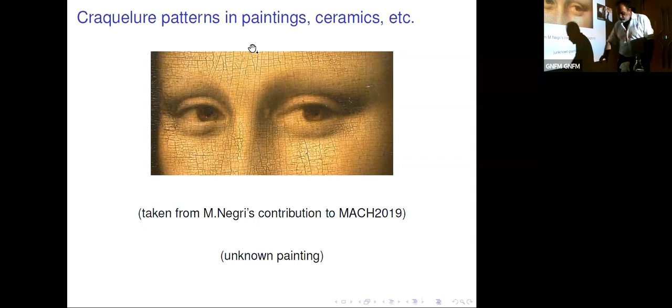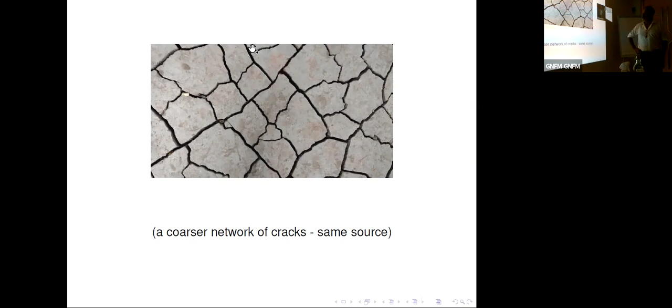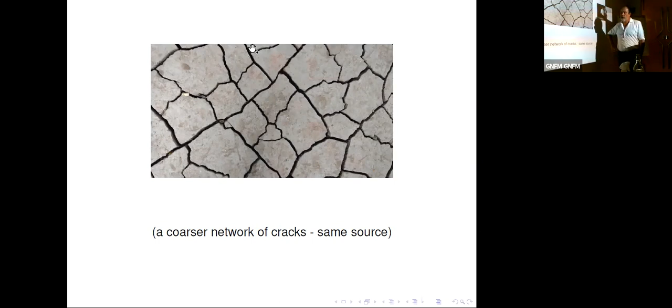So this is a kind of fracture that you can encounter in paintings, in other artifacts like vases or ceramics. You can encounter other types of more disordered cracks, and here is another more complex, more disordered crack in another kind of medium, in which you see very little ordering.

And this kind of phenomenon can be modeled using a two-phase, two-variable, say, mathematical model, in which you want to picture the surface of an artifact, for example a painting, and you model the behavior of the painting as a brittle medium deposited or glued to an elastic substrate.

So the abstract mathematical setting is that you are considering a thin layer of paint, or of glue or another material, which sticks to the substrate. The substrate, in the case of painting, is canvas, and what you want to explain and model is the pattern that you see on the visible surface.

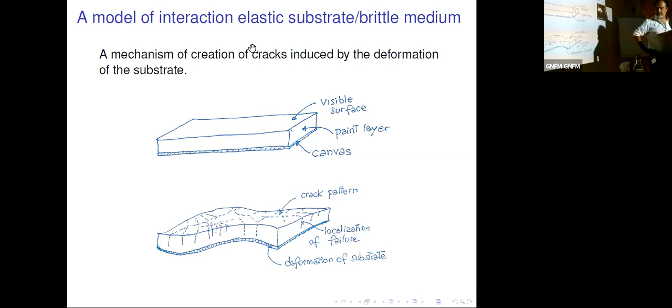So what you expect is that as you deform the substrate, so this is a mechanism driven by the deformation of the substrate, the deformation extends to the layer, which is brittle, so it may crack, it may dissipate elastic energy. And then you localize: instead of having everywhere a diffuse elastic response, you have a localization of failure in some zones, and what you see on the upper surface is a pattern of cracks.

So how to model? This is the geometrical part, very simple, and how you model then... I see the whole picture here. Please don't type.

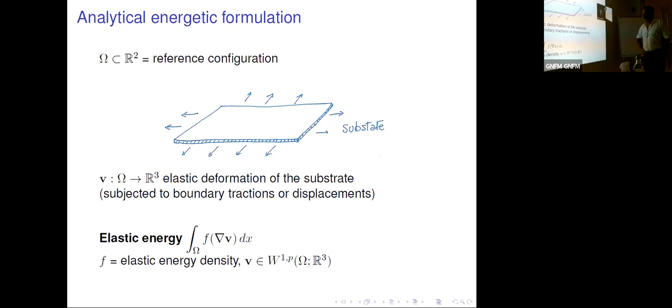So how do you model this mechanism mathematically, energetically? You have a reference configuration, the canvas, in which you have a variable which is still an unknown: the elastic deformation of the substrate, of the canvas. You suppose that you know almost everything about how it behaves. So you have an elastic deformation, which you can think of as being from R2 to R3, and an elastic energy, which you can think of as linear, depending on the gradient of this deformation. This is the usual elastic energy, and the variable is thought to be sufficiently regular.

On the visible, partially visible surface, you see also a pattern of cracks. So you have a deformation of the surface which allows for discontinuity. It's a brittle deformation, sufficiently smooth outside an array of cracks. The array of cracks can be thought of as the set of discontinuities of this deformation. That's why we have this S of U here.

And the energy is the elastic energy of the surface where it's not broken. Then the simplest way to model the introduction of fracture is by a Griffith criterion: the energy that you spend to open a crack is, in this two-dimensional case, proportional to the length.

Proportional with a factor which is called delta, which is the fracture toughness of the surface. And then you have an interaction region. So up until now, you have two unrelated variables. These are related by the fact that you have this thin layer, and you have an interaction term which depends on the difference, and so on the relative displacement measured on the reference configuration, two-dimensional configuration.

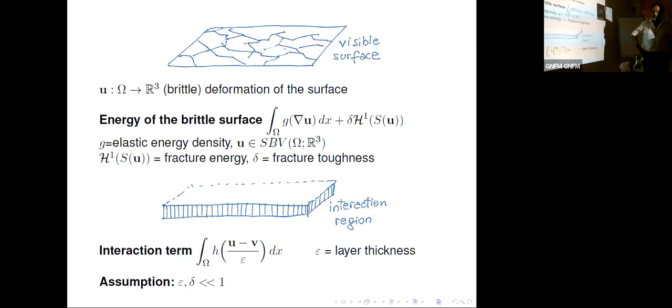And this depends on a small parameter, which is smaller or larger, say, but we can think of it small, which is the thickness of the layer of paint. And we think both of these parameters to be small. So you have a small layer painting. You think of classical paintings, not Burri or some other more recent, more concrete painting, say, and you allow for a lot of structure. So delta must be small, otherwise you cannot allow for a number of cracks.

Okay, and you sum up these contributions, and our result is an asymptotic result, which proves that in the end you have a homogeneous behavior of the medium, which is described by a single elastic deformation. So if you have small thickness and small fracture toughness, then in the end something which can be expressed by an asymptotic formula only in dependence of the underlying deformation. But now, okay, this was a mathematical result, which in a sense proved that you can have a theory in which everything then is hidden in this F0, for which you have a formula.

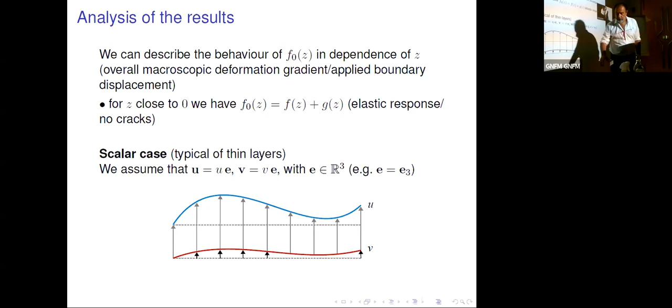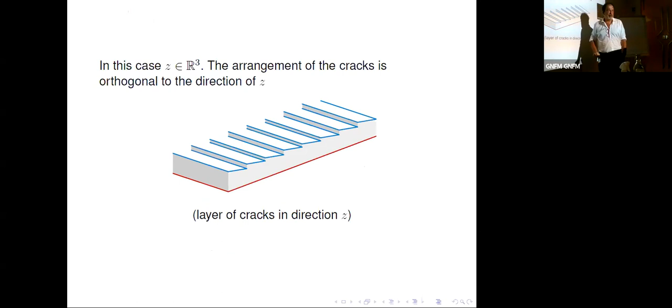So in this case, you have only a scalar variable, or two scalar variables, and everything can be phrased in terms of a scalar product. So the outcome is that, remember, now we are looking essentially at the profile of the deformation of the upper part, and we want to see the location of the discontinuities. And what we see is that as we deform in this direction, the gradient of deformation is aligned with the direction of Z, and you have cracks perpendicular to Z, and they are essentially one-dimensional. So the fracture is localized on lines, and everything can be reduced to a scalar homogenization problem.

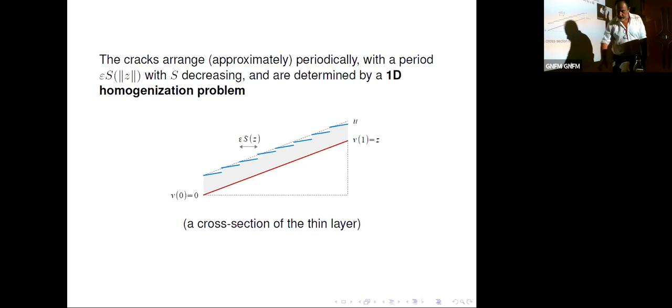So the problem here now is to determine the distribution of cracks. And we see that these cracks are distributed periodically. And this is the cross section of what happens in the orthogonal direction, and until some threshold, you have no cracks.

And this is not due to a geometrical periodicity. There is no geometrical periodicity like here, but this is just simply energetically driven, and the period depends on the only parameter, which is the modulus of z.

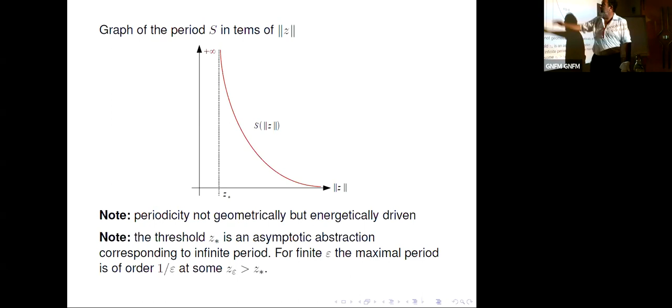It's important to see that here you have some abstraction, if you want. This plus infinity here, passing from plus infinity to a finite period, is something that you cannot do in a finite sample. In a finite sample, there will always be a gap here, and you start from some fine large but finite period.

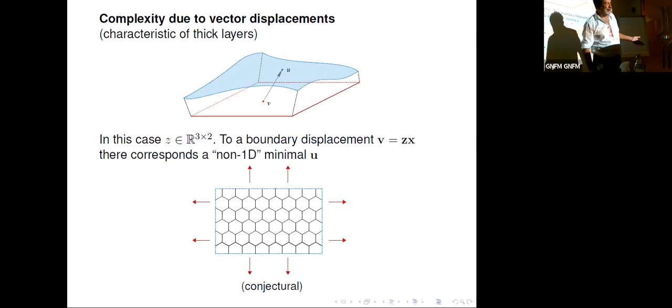Another answer is dynamic. So the complexity can be due to nonlinear evolution. You have a nonlinear term due to the fracture, which implies a lot of non-uniqueness in cases of iterated minimization problems. So if you model this evolution of these cracks, even if you think the evolution is quasi-static, it is probably driven by some very stressful events, like the variation of temperature and so on. So you cannot expect to have a continuous evolution of cracks, but some events which induce some bifurcation.

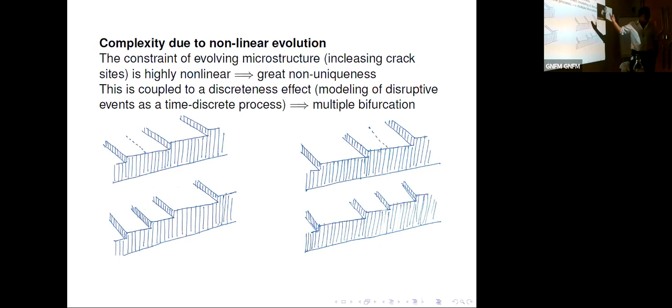So you make some experiments. The first time, even if you take a very simple sample, you get a regular array of cracks, but then as you evolve, at the second critical event, you may have a crack which develops independently on one side. For example, here you can have cracks which are periodically distributed, and then the next crack can appear here or there with the same probability. So you have multiple events in which you can choose, or you can have non-uniqueness.

So if you start pulling on one side, you have first a regular array, then you continue pulling, and you have a constraint that the cracks must be contained in the previous set. So energetically, you subdivide some of the cracks. It can be not energetically favorable to subdivide all of the cracks. Then, if the next event is in another direction, you want to generate cracks in this direction here. If you pull, if the strength is large in this direction, then you can have subdivisions which are not regular anymore. So you can repeat this bifurcation in more directions.

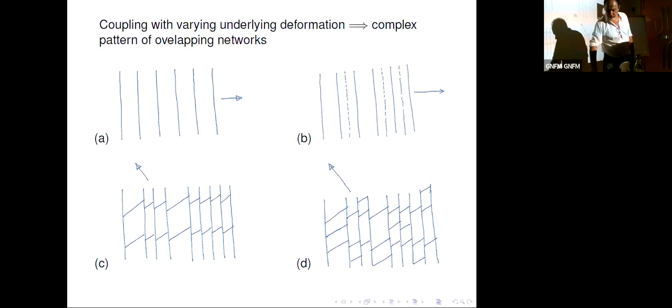So this, in a sense, explains that even for very thin layers, where the scalar approximation is fine or acceptable, you can have a complex pattern of cracks. And so this somehow is our answer to our curiosity about the application of the model to craquelure. I have to say that as you proceed, you see the interesting features of this kind of model. We can also proceed in other directions, which are maybe less linked to cultural heritage problems.

For example, we can impose a periodicity constraint on the crack. This can be thought of in the sense of a cultural heritage problem: craquelure in mosaics, in which you have a small size of the mosaic tile, which must be comparable with the thickness here. And here you have a lot more complexity due to the incommensurability effect, and this becomes mathematically very interesting.

So these problems maybe don't have a direct relevance to cultural heritage restoration problems, but still I can see that an influence, a suggestion, can come from these problems and can help us to develop new interesting problems, also in mathematics. Somehow there is a two-way interaction between these communities.

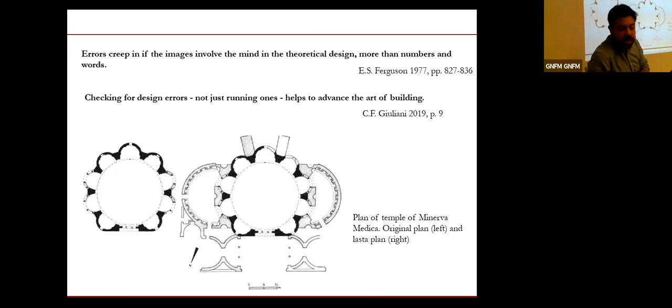Starting from a few suggestions coming from Ferguson and Cairoli Fulvio Giuliani, who said that in the study of cultural heritage we should study, first of all, the process of construction of a building or structure, not only what we have nowadays. In this process, we have to know why a structure or building was built in a particular way. Here you see the plan of the Temple of Minerva Medica, the original plan on the left and the last plan on the right.

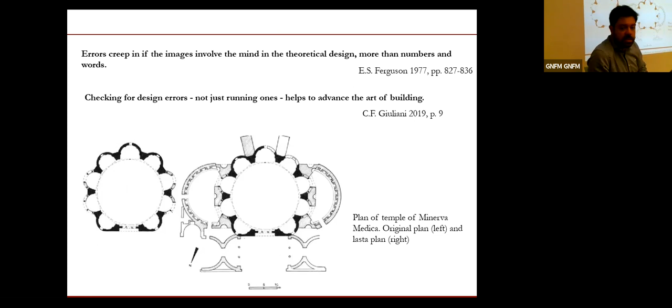On the right, of course, there are a lot of interventions—statical interventions to let the temple, the building, be more functional for the necessities of that time.

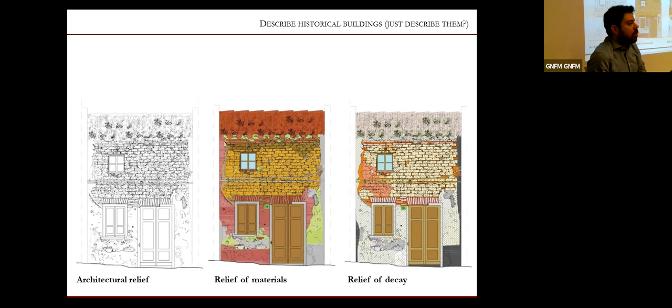Nowadays, experts who face historical architectural problems on historical buildings usually make a lot of different reliefs: one for architectural type, one for material, one for decay. All of them are different from each other, and all of them are usually taken as one lonely part, with no whole approach to the building. So my first suggestion is to think about the analysis of a historical structure as a whole body that could be studied in one single approach.

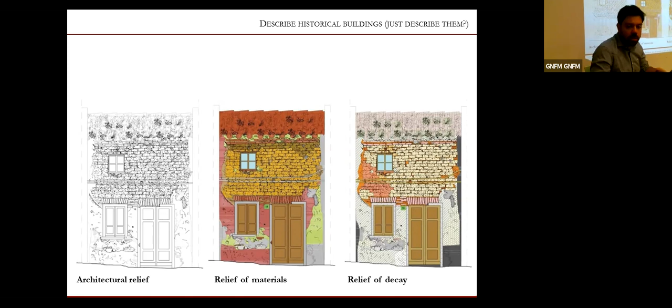This is the main goal usually searched for in cultural heritage: the creation of an atlas of materials, an atlas of masonry composition or mortar composition. This is usually taken as the point of arrival of each study, so not studying the structure or the process of the structure, but just studying the state of a building as we can see it today.

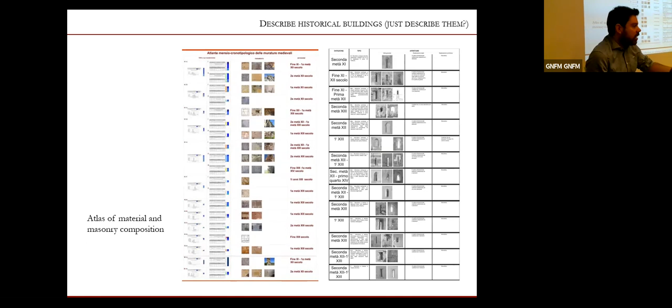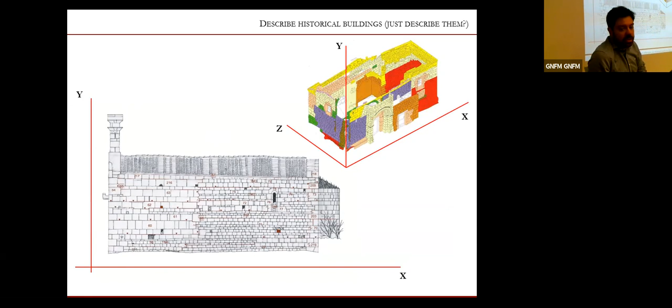Again, the idea is that historical buildings are usually studied as surfaces, as a sum of surfaces. So just through two dimensions, and not as a building should really be studied, in 3 dimensions, 4 dimensions, but just as a sum of surfaces.

What could be useful? First of all, Cairoli Giuliani called this type of research a crack map. Please bear with my graphic on the right, but we know that the damage of a building usually starts at the moment it starts to be used. Material starts to have damage at the moment that the building or structure starts to be used.

Along the story of the building, there usually come a lot of events that can increase the damage or increase the health of the building. To have a global idea of this situation, the crack pattern, a crack map, could be useful to understand how to intervene in this kind of situation.

First of all, trying to understand the differences and discontinuities of the foundation soils, so a study of the soils, to study the loads connected to the structure, the geometry of the building, and the variety of loads, accidental loads, permanent loads, that affect the structure. And of course events that can occur, like earthquakes, landslides, or sudden events that can affect the health of a building.

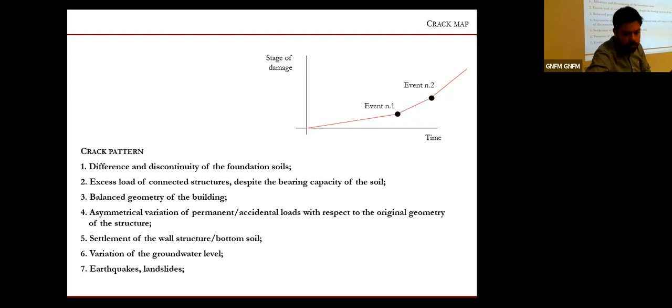I guess that of the 5 stages commonly used for fact-finding, for the study of historical buildings, a common fact-finding process, 3 of them could be useful even for mathematical modeling. First of all, a survey made by comprehensive autoptic verification on site, so a map of lesions, a map of the damage of the building, that could be helped by mathematical modeling.

An identification of the edification process, an analysis of structural change, and at the end, the 3D model, the representation of the building, that could be helped by the summary of the survey and the technical research made for this kind of research.

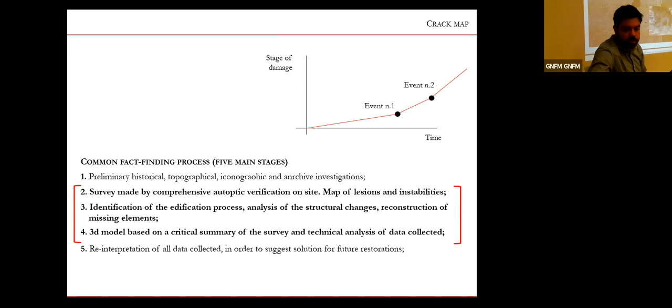This is a kind of event that I was mentioning. This is a part of the Aurelian walls along Porta Pia that was attacked during the battle of Porta Pia, and this event caused, of course, damage to the wall. We don't know exactly, but we can imagine that the entire structure of this sector of the wall still has damage today, that may be increasing over time. So this is the first stage, a first step that could be taken into account.

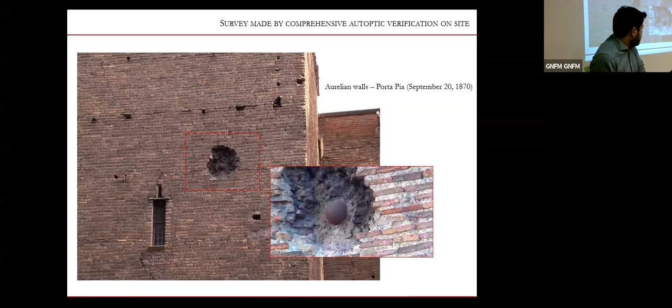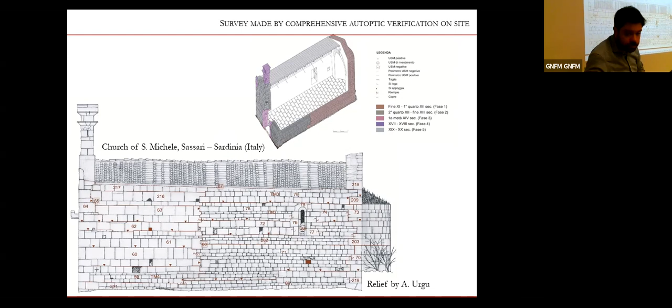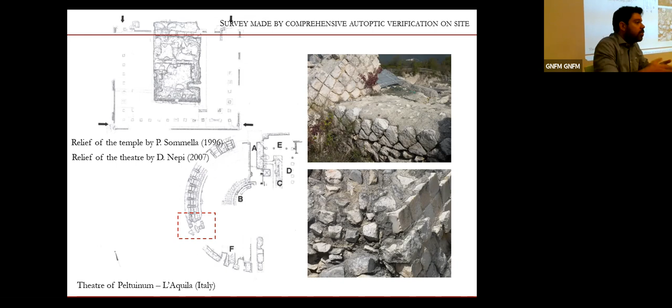Again, the use of different materials could be useful on one end, but could increase the damage on the other side. Even yesterday, we saw an image from Peltuinum, a Roman site close to L'Aquila. Here is a zoom analysis on the wall of the ancient theater, and here the restoration process: in order to conserve the perimeter wall of the theater, new material was used on the ancient one. We can imagine that the surfaces between the two materials can collaborate or not. It should be studied, to understand the process of this kind of collaboration.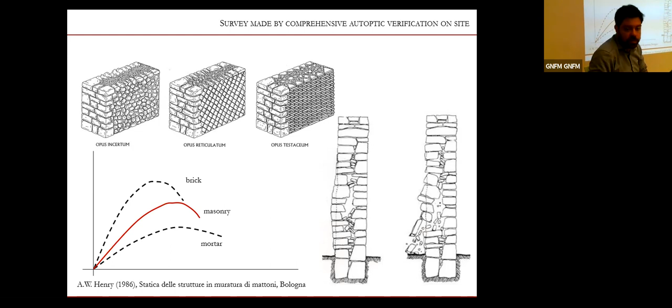At the same time, the study of mortars shows they can have different capacity of resistance. So even in this situation, the resistance of mortar should be studied in order to understand the type of load that it has.

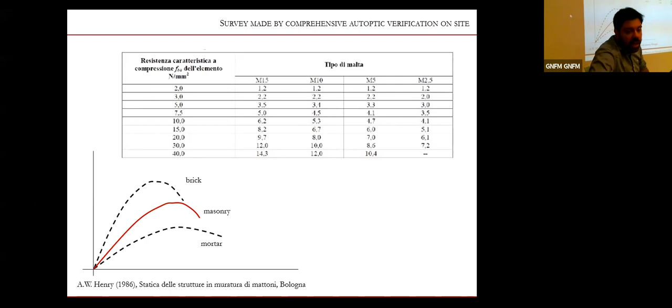Another point of view, once again on the process of construction, is about some consideration of the phases that can interest a building. Here is an example that comes from the research of Alessandra Ten, who is a professor at Sassari University, about the phases of building of the Aurelian wall. Here you see on the left the Aureliano phase, on the right the Onorio phase, who duplicated the wall in some part of this path, and of course we study the kind of structure.

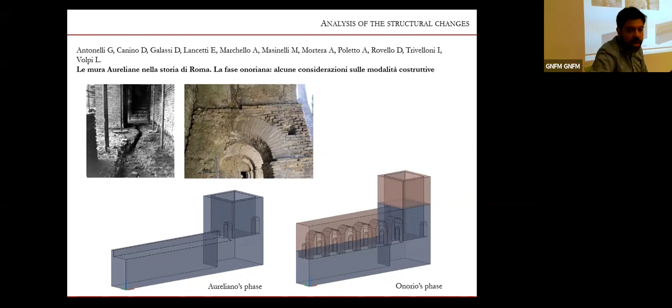You see here and in the other image a kind of fracture that came into the wall. This of course came because of the new structure, the load of the new structure on the ancient one. In this case, I guess that mathematical modeling could be useful to understand the process of this kind of damage, to understand in time and in a kind of measure how this damage can evolve, if it will evolve or not. Here is another example, even in this case on the Aurelian wall, to understand the process of the ancient structure.

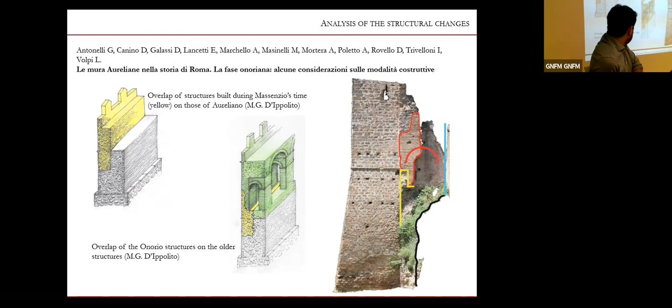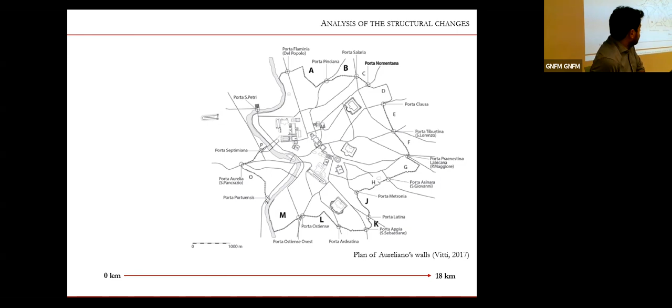Remembering one last thing: for the case of the Aurelian walls, we are talking about one monument that is 18 kilometers long along Rome. So even the condition of the soil, the condition of the material, the condition of exposure to agents that could be dangerous for the structure have to be taken into account to understand how it's possible to study the structure, and in the future what kind of intervention could be useful for the monument. So not only pay attention to a part of the monument, but try to pay attention to the whole monument that should be protected.

So one more opportunity, in conclusion. I tried to describe before the process of damage in a historical, ancient structure, trying to understand from year zero how the damage started until 2021, passing through events that increased the damage. Could be useful. I try to propose another point of view in which mathematical modeling should be useful from an inverse path—not just to understand how the damage could increase in the future, but for people who work in cultural heritage in the field of archaeology, trying to understand how the damage started. So try to understand the damage from 2021 back to year zero, to pass to the past and not just to the future. Thank you.

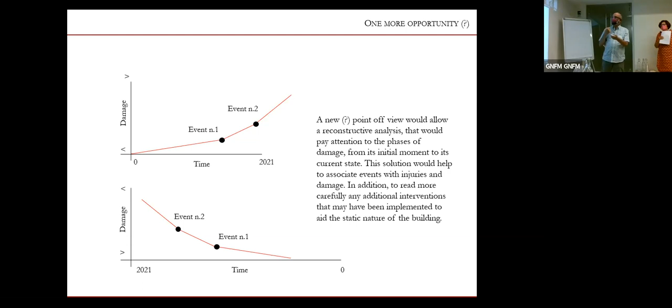Yesterday we saw a lot of models of possible damage, and there are other models. But usually these models have a time direction. So the inverse process to go back in time is problematic. You have a lot of possibilities, so you do not have a unique way back, because time has passed. In principle, it's not feasible at all.

Honestly, may I have this? I think that the situation is similar. I found some similarities with the experience in restoration, for example of bronzes, where you just look at your structure and you find some pattern, and from that pattern you can guess what happened before.

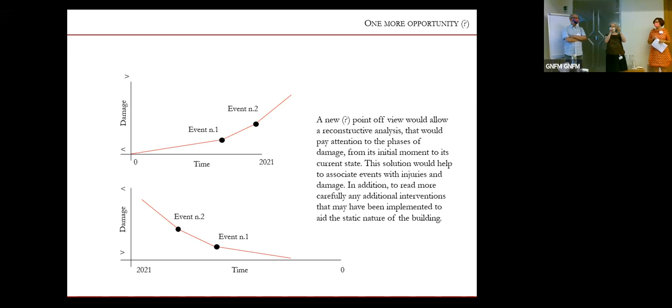Yeah. To do this, you have to have some kind of maps, some kind of model in which you know that if you start from this point and then this happens, and this, and this, then I will get this one. So I think the matching between your mathematical idea and your architectural idea is that to some extent you need some modeling of what happens in the right time direction.

And then you need maps of final events that you can check against your structure, making some kind of pattern recognition. Would it be possible? Just a guess. No, I think that mathematics is very important. I mean, I don't know, there is one way.

From my point of view, my field of research is trying to understand why something happened in the past. So in the architectural field, I would like to understand if some intervention in a structure was or wasn't necessary because of static reasons.

For example, the intervention of Honorius on the Aurelian walls was made necessary because of barbarians, because strangers were coming to Rome. So he ordered a taller wall to protect the city, but this caused damage in the original structure. We already know this, but for new structures, I think it could be useful.

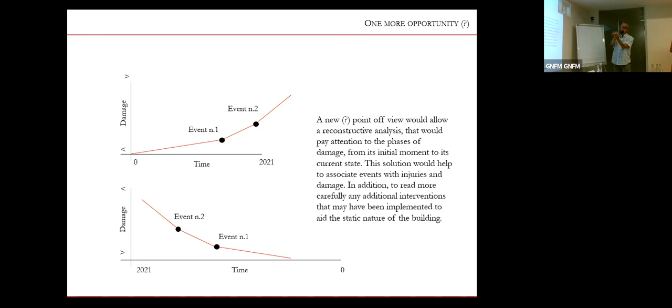Okay. Maybe with some constraints, with some supplementary information, you can try to do something. But I think there are a lot of ways to destroy a monument. So there is not only one line. Yeah, you get the same final situation from many different parameters.

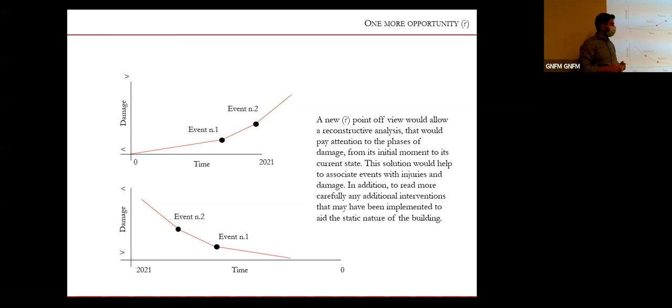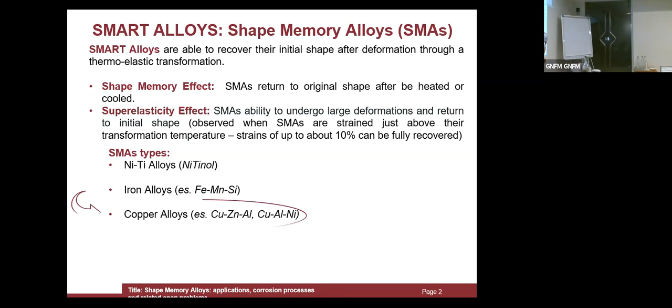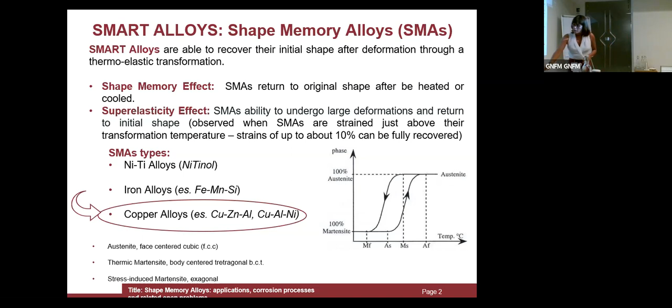Okay, the martensite transformation. So the transformation from austenite to martensite is diffusionless. So we don't have chemical bond breaking, but we have a little movement of the atoms that allows the transformation from austenite to martensite. In particular, the transformation is divided into two main phases. The first phase is the Bain phase, in which we have the formation of this new martensite. And the martensite has a really flexible structure.

The second step of this transformation is the lattice invariant shear, where we have a rotation of the chemical bonds without any breaking of the bonds, and also we have this particular twinned martensite, a structure that allows it to shift, so to come back to austenite. So it's a movement between the two different fields.

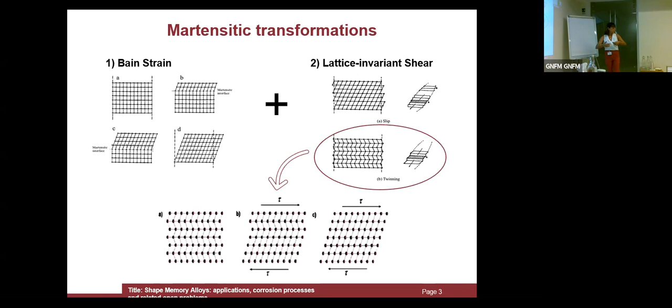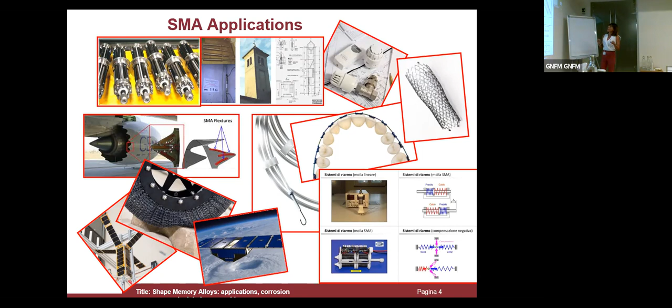Okay, here I would like to show you a few SMA applications. Nitinol can also be used in the aerospace domain. Here we have the use of nitinol for teeth alignment or other biomedical applications. Here I would like to show you the use of the SMA spring, and many other different applications.

Okay. A really interesting application is the self-expandable stent. The stent is made up of a nitinol SMA, and it's a really interesting device because it is contracted in a martensite field. It is put inside the artery, and thanks to the body temperature, we have an enlargement of this metallic

mesh that guarantees the blood flow. The enlargement is due to the austenite formation. So we can see the differences in the movement between austenite and martensite.

Here again, we have some civil engineering applications of copper, zinc, aluminum alloys. And I don't know if you can see, there are some reinforcement elements that can be used for civil structures, buildings, bridges. And this kind of SMA alloy is really cheap. So they are interesting from an economic point of view.

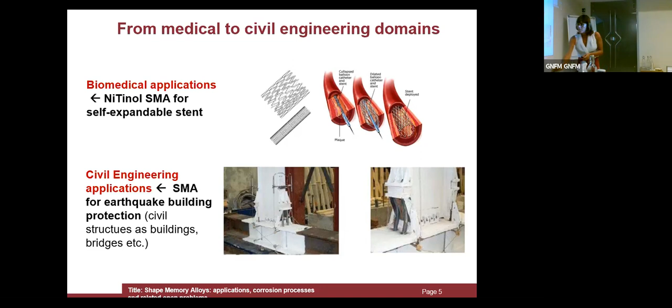Okay, briefly, we identified corrosion processes using different chemical solutions. We set up the opportune laboratory corrosion conditions, and then we evaluated the physical and chemical parameters. We try to evaluate if the chemical variation affects the shape memory effect and/or the superelasticity effect. Okay.

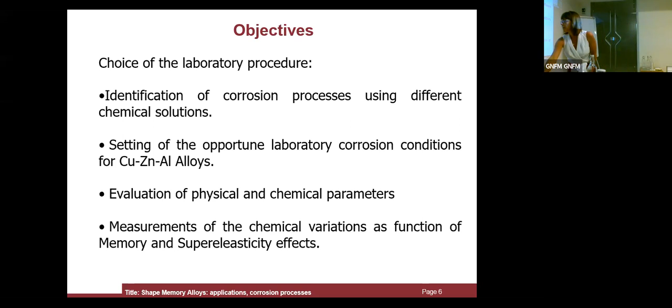From a chemical point of view, we would like to investigate the resistance of this kind of alloy to corrosion. For doing this, we used electrochemical analysis, in particular potentiodynamic polarization curves, and we analyzed the tarnish products developed on the surface using two really

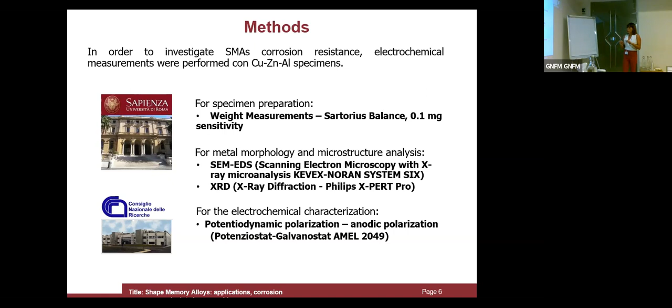well-known techniques: scanning electron microscopy with X-ray microanalysis in order to detect and analyze the metal morphology, and XRD diffraction for the microstructure analysis, for the crystallographic identification of our samples.

Okay, so we focus our attention on copper, zinc, aluminum alloy with 20% of zinc and 5% of aluminum. We produced this alloy in the laboratory at the Department of Chemical Engineering, thanks to the support of Engineer Brozzo and Professor Natali. And we cast our bronze ingot at 1150 centigrade. Then we cool the ingot at 25 Celsius degrees, and then we analyze it.

It was really important for us to try to simplify our research and to have a beta phase brass. The beta brass is the phase that guarantees the shape memory aspect. So here we have the copper zinc phase diagram, according to which we selected the opportune composition, and then we analyzed with an XRD instrument the surface of our samples.

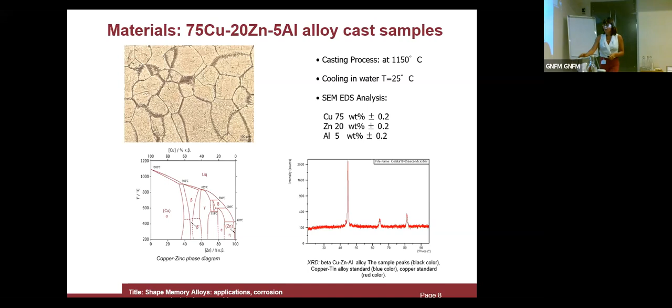A few photos regarding the instrument used for casting alloys. Here we have a centrifugal injection oven. We use these molds for producing the ingot.

I'm sorry, but it's not possible to see. But this ingot is very shiny. It looks like gold. Obviously, it's not gold because it's copper, zinc, and aluminum. But it's really, really shining. Let me say that it's really beautiful. And here we have a cutting-off machine in order to section these ingots and to have the samples that can be used for the experimentation.

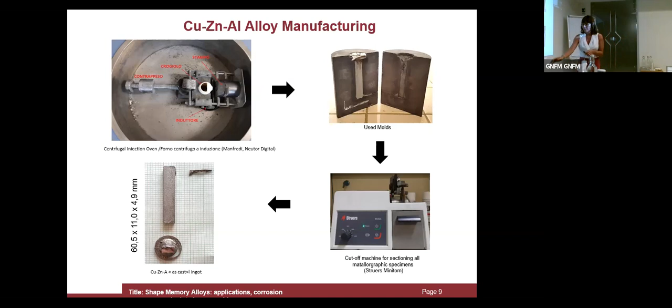Okay, briefly, the electrochemical analysis. Here are our samples. This is a classical configuration for electrochemical potentiodynamic polarization. And we used different corrosion tests: nitric acid with different molarity, because it represents well acid rain in an urban context.

Also, we used sulfuric acid with different concentrations, because it represents very well acid rain in an industrial context. And then we used a solution that reproduces seawater. So we would like to see the differences in the corrosion process regarding different chemical atmospheres.

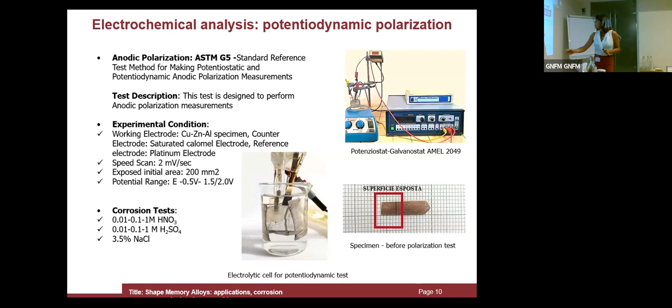Okay, here we have the sample after the first potentiodynamic test in nitric acid. I would like to show you this SEM observation. This is a chemical image where the different gray levels reflect the composition. It's not a photo. And here we have the characteristic formation of the twinned martensite.

So the movement that I described before is well represented here, because it's really characteristic. The structure of martensite is really characteristic. Here we have the curves obtained at different concentrations of nitric acid, and here are reported the current densities as a function of the potential applied.

For a better understanding of the entire process, we characterized with the EDS spectrum, and here we have the peaks characteristic of the elements of our samples.

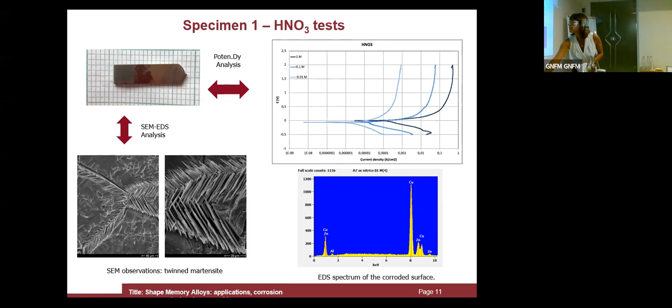Okay, this is the specimen after a sulfuric acid test. Here again, we have some observation of the martensite forms. Obviously, in this case, we have a product, mainly copper sulfate, because we use sulfuric acid. And also again, the current density with respect to different concentrations, 0.01 molar, 0.1 molar, and 1 molar. And then again, the EDS spectrum of the corroded surface.

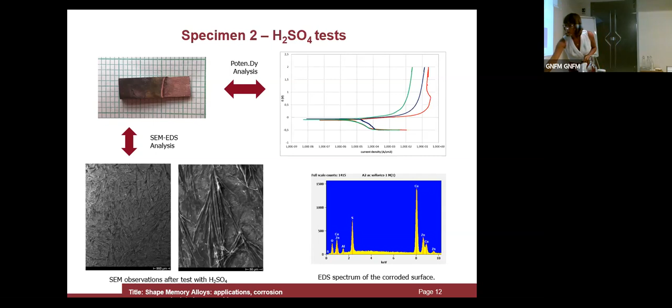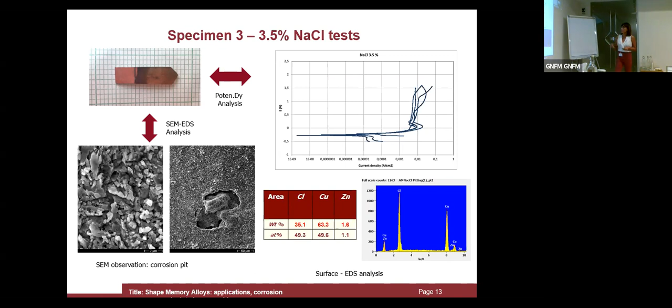Here I would like to show you some corrosion morphologies before and after the test with different etching of the surface. In fact, the surface can be pickled with different kinds of acid in order to better show the structure before, in order to have, from a metallurgical point of view, a better understanding.

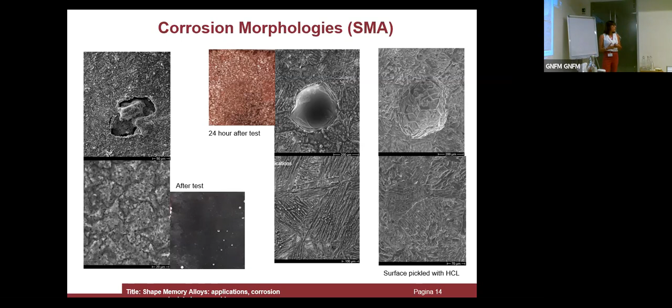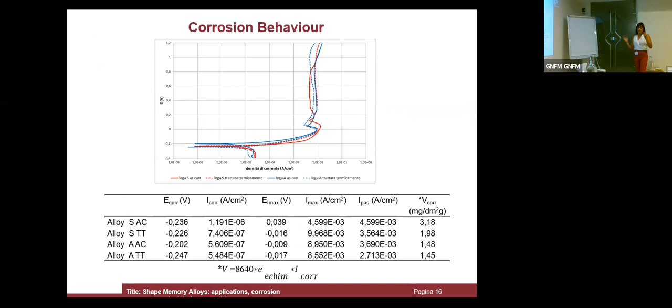Okay, here just one of the last slides. I will show you the corrosion behavior of the previous alloys, and here we calculated the corrosion rate with respect to the different alloys before and after treatment in order to see the kinetics of the process.

Regarding the modeling, in our group we collaborated also with Professor Elena Bonetti. Professor Elena Bonetti developed in the past shape memory models. I think it was a Frémond model. It's called the Frémond model, and it's a phase transition model in which they take into account the transformation of austenite into martensite and vice versa. They consider the difference in the structure, because austenite is a cubic cell and martensite is a tetragonal cell. So this change in the cell permits the shape memory effect.

In our model, we will start from these models, and we would like to add corrosion parameters. The final aim is to understand how corrosion affects the shape memory. In our samples, we cannot see any effect on the shape memory, so with our tests the shape memory is guaranteed. But it's important to understand how corrosion can affect the shape memory, because these are elements that are used for civil protection, so the applications are really wide. So it's important to better analyze the effect of corrosion in structural activities.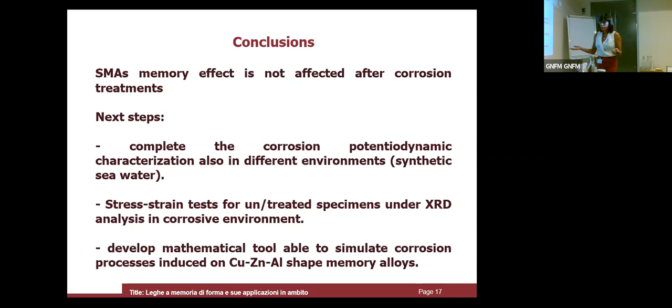One part that is missing for us is to evaluate stress strain tests, so to put our samples under stress strain tests in a corrosive environment under XRD analysis, because it's important to have this characteristic to better understand the behavior of our alloys in particular conditions. And at the same time to perform XRD, because the stress strain causes a variation in the peaks of austenite and martensite, in the ratio between the peaks of austenite and martensite, and it's really interesting to consider in our future. So, thank you for the attention.